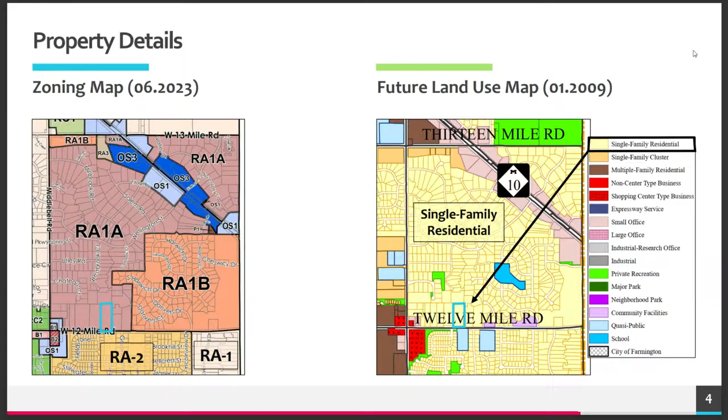Moving over to neighborhood outreach. The northern neighbor, Wood Creek, we engaged with Hank Morawski, president of Wood Creek, at an early juncture. Actually, at the April meeting, Mr. Morawski was kind enough to write a letter of support for the development, which I will share on the following slide. The western neighbor, AIM High School, we've had multiple conversations with the AIM headmaster, who's been supportive of this development from the onset.

In addition, AIM Academy is amenable to granting a secondary access along our shared western property line, which was contemplated in the 2007 recorded shared access agreement between the city of Farmington Hills, Echo Park, now AIM High School, and the Youssef family.

On the eastern property line, Mr. Levy and Mr. Cole, we've had conversations with both of them, shared plans with them, and they've given us positive feedback and reception toward the plans. Actually, Mr. Levy, who lives in the house to the east of us, requested that we actually provide a greater rear yard buffer between our townhouses and that shared eastern property line.

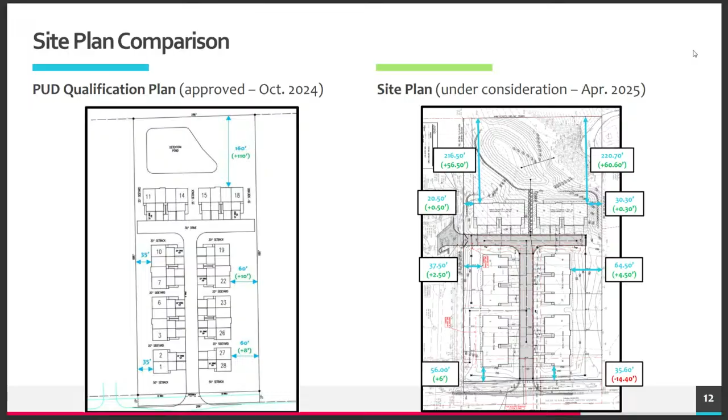Okay, so this is the site plan that contemplates that secondary access into AIM Academy. You can see it right here. And then you can also see where the Pebble Creek intersects our property, and I'll be talking about that a little bit more in the following slides.

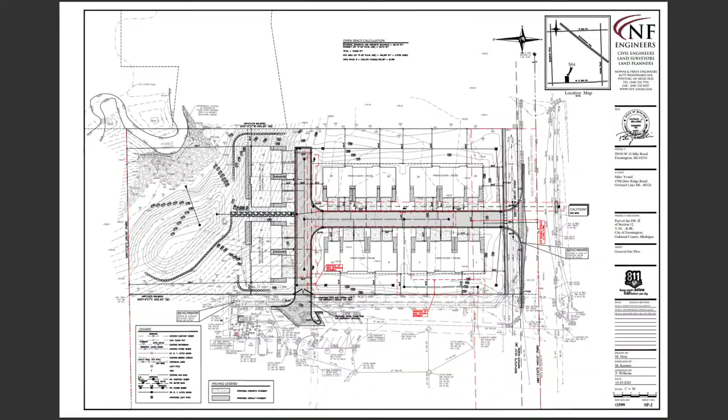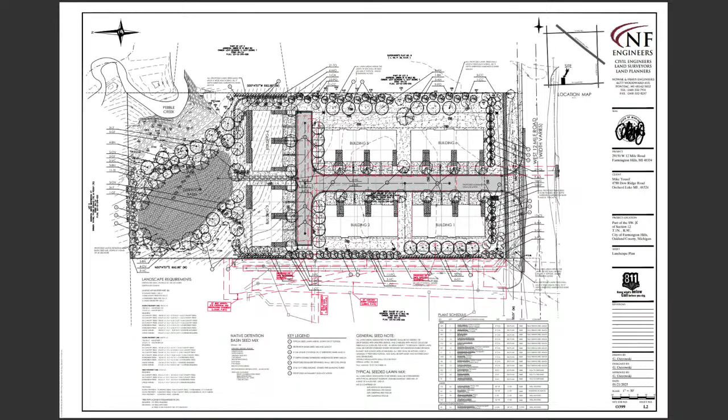Now, this is the landscape plan. Understand that the entrance is the same. However, not all the plans were updated to reflect that secondary access, but we are still contemplating that secondary access to AIM. Per the direction of Mr. Levy, what appears to be our northern property line, but is actually our eastern property line, we are putting a bunch of evergreens as well as additional landscape plantings to shield this to his residential household. We've got some nice plantings along our 12-mile frontage, nice screening around AIM Academy, but most importantly is all of the screening we are proposing around the stormwater basin and where the topography falls. So that'll be a really pretty amenity that residents can enjoy, specifically the residents that back up to that northern property line.

The 112 contemplates 3-bedrooms across the entire 28-unit development. Again, 50% of residents, based on national data M/I has collected, opt for the standard 2-bedroom, 50% opt for the 3-bedroom premium. At the end of the day, if everyone was to select a 3-bedroom unit, we would be roughly 8 units above the RC1 maximum. But with that 50-50 split, we'll be in line or slightly on the higher end of RC1. It is not my belief that we will exceed RC1, but I wanted to provide you with the absolute floor and the absolute ceiling so you could get an understanding, because it's the tenant preference, the resident preference, at the end of the day.

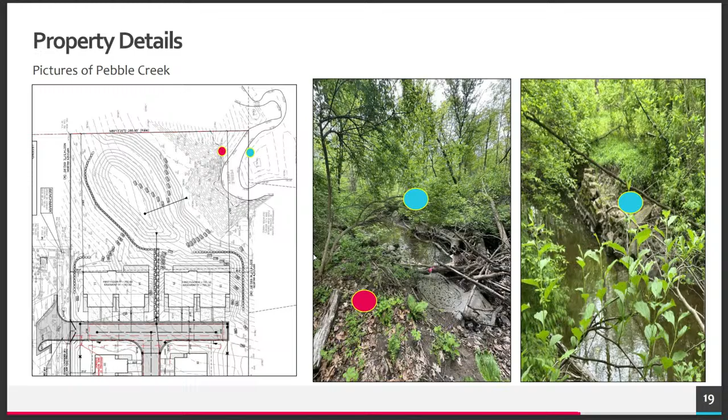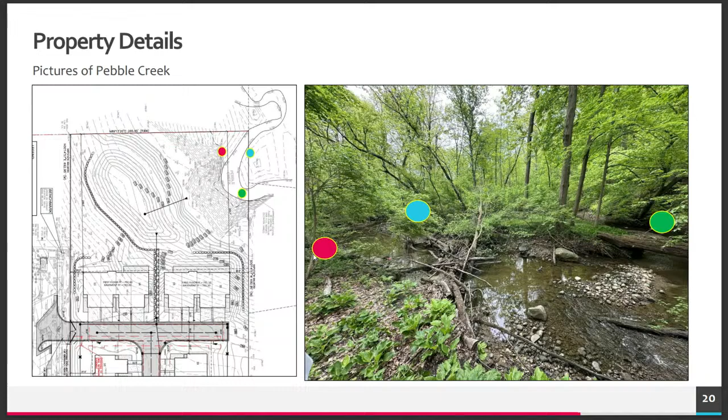This has been an issue that the City of Farmington Hills has tackled for many, many years. So as part of the redevelopment of this project, this is something we take as top priority to ensure that no further erosion continues along our portion of Pebble Creek that intersects our site.

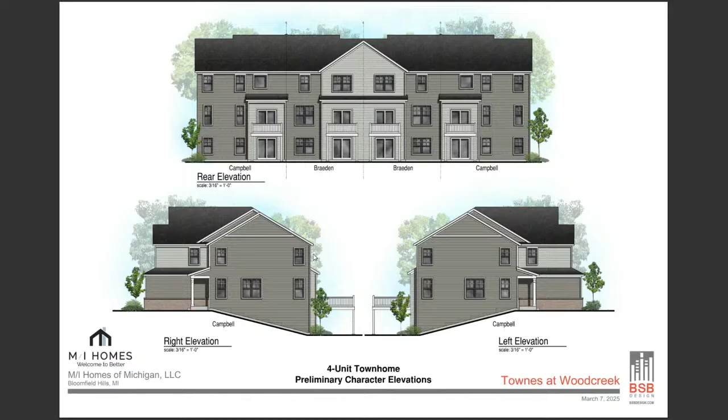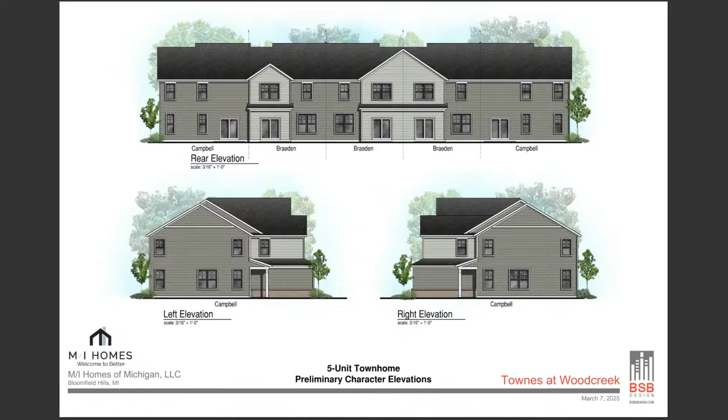Here is a representative elevation of the 5-plex units that will be on the eastern and western property lines. These will be slab on grade units, so the front elevation as well as the rear elevation will appear 2 stories. And again, these are all in compliance with the maximum allowable roof heights. We're at 27.7, ordinance is 30 feet.

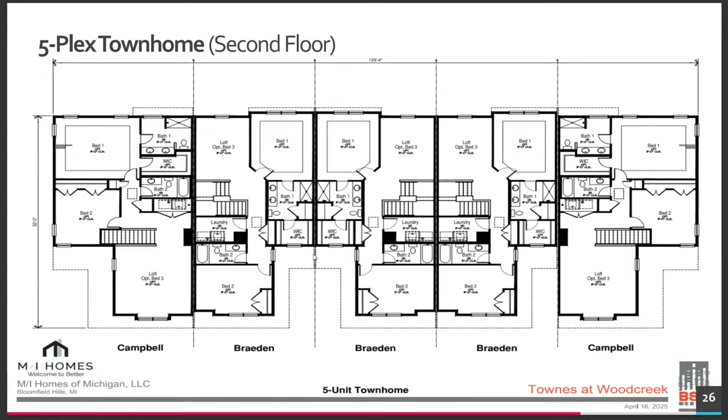Thank you very much. So who wants you to put erosion control on that creek? It was a request made by engineering in Mr. Cabrera's review letter. So the way erosion works, the higher the velocity of the water, the more soil it can hold. So the slower the water goes, the less erosion you're going to have.

So what they're asking you to do is clear out the river so the water goes faster, and then protect the bank. I would urge you to not jump too fast on that. If you just leave it alone, it might be fine. Just remember, the more debris you take out of that river, the more erosion you're going to get, because the water's going to move faster. I say that as someone who was with the Corps of Engineers for 20 years.

Okay? Oh, no, I absolutely respect that. And again, whatever guidance engineering gives us, we'll follow it to a T. I know, question them. I'll try to. As a developer, I don't have all the facts in front of me. But you've got it coming down, it turns 90 degrees, and then it turns another 90 degrees. In the long run, it's probably going to go straight. You know, streams meander. So I question it. Absolutely, we'll look into that.

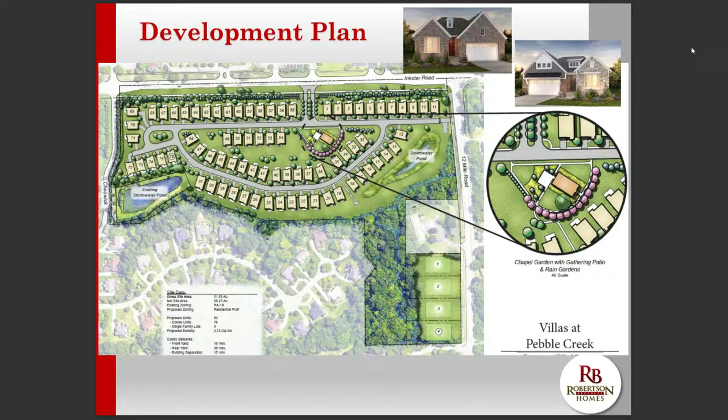So this is essentially the exact same thing that you have approved, with one exception, which I'll get to in a minute. But I wanted to point out that this was obviously vetted many times. We've had more units on previous plans, but hopefully everybody's happy with what we're proposing as far as the product and the overall project.

Tonight the request is very simple. The approved plan is what you see above along the frontage, along Inkster. The new plan would add unit, what was circled as 66, in place of where that street was. If you recall, the last time I was here was for the removal of that street.

This would have happened a lot earlier in the process if DTE could have given us information, but the information is that one pole has ITC equipment on there. It was going to cost a few hundred thousand dollars to move that pole, and we did not need that second access because we have an emergency access to the south on 12 Mile. So that was the last time you saw me, to remove that roadway, which did get approved by City Council on the 3rd of March.

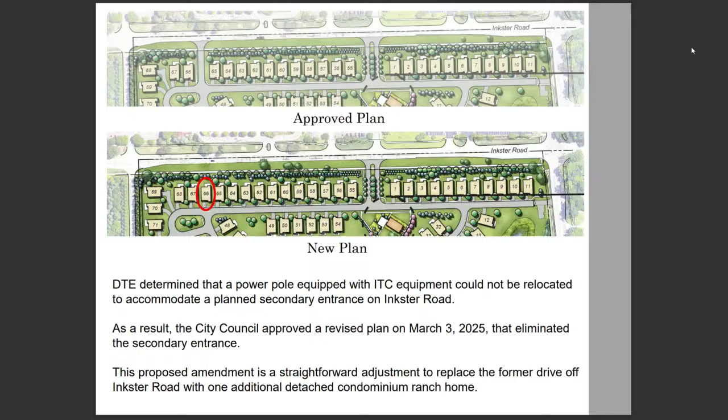Again, it's very straightforward, just to replace that open area, which had the road, with a unit. We think there's a lot of benefits to this. It provides another opportunity for residents to stay in your community or to come to your community, since it's an age-targeted product. They want to downsize, they want to stay in your community, and this is one more opportunity for them to do that. It supports your retention and reduces the likelihood of them going elsewhere.

So we've been through all this before. It opens up opportunities for families to then buy their homes in the school district, generate increased tax revenue, and one more household to contribute to the local economy. So again, we don't see this as a negative. We see this as a positive, a net positive to everybody.

I don't think I need to go through this again. You guys have seen this, but I just wanted to throw it all on there to familiarize yourself again. I think this is the important thing. It's a very important plan for Farmington Hills, really for any community. But we've been looking, as you know, a long time to build this type of product here.

You need basically 40 to 50 of these every single year, so having one more just helps get to that requirement. And this buyer profile, compared to single family, it's almost half—just a little bit more than half of what a single family has as far as traffic and utility. That comes straight from our traffic engineer: considerably less. So this one additional unit is not measurable whatsoever.

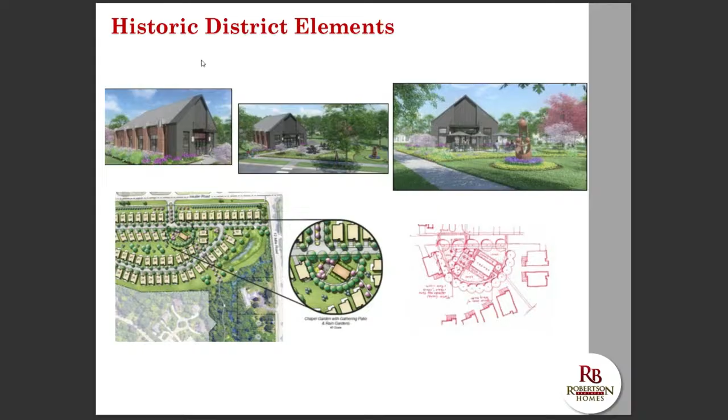If you recall, we do have the historic district elements. We'll be removing much of the building but keeping the chapel, which is the most important part I think, and creating that as a community space. That has not changed. Nothing has changed on this plan whatsoever except for that one additional unit we're proposing.

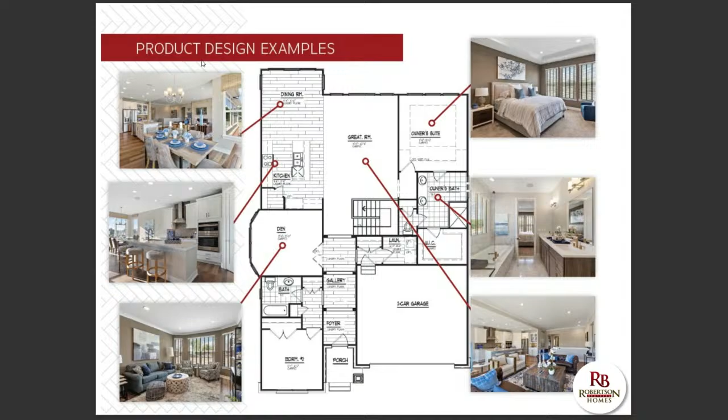I don't think I need to go through these because you guys know, but we've got about 40% of the site as open space. That doesn't change with this. And again, we had a road there before, so obviously that doesn't change it. There'll be a homeowners association to maintain all the landscaping. These are the homes which you've seen. Again, I don't want to go through this quickly, but you know the plan very well, and this is exactly what people are looking to buy in your community.

So I just think it's very simple. I think it's fair to say, had we come to you originally with 76 detached condominiums and 4 single family, I don't think there'd be any issues. In fact, this body has approved more units with townhomes on Inkster in the past. No measurable additional traffic, obviously, for the one unit.

No one will ever see that, and there's just no neighborhood opposition. You're not going to see anybody opposing this. In fact, had I asked, we'd have the neighbors supporting the additional unit. We've just worked very hard with them over the time we've worked on this. Again, no change to the plan—everything stays the same, open space, chapel stays, and it's a plan that the community wants.

So I'll say it again: one more opportunity for home buyers to stay in your community with a quality housing option. It's one more opportunity for a family to move into, a downsizing couple's home. It's one more home to produce property taxes and one more household to patronize your commercial establishments. So I appreciate your time. I think this will be the last time you see me on this, but I'm happy to answer any questions you have, so thank you.

Fingers crossed. Any questions? Barry? Some of us have been around for a little while.

Yes, like, I started out on planning in 1995, kind of migrated to council and I'm back. And this is about the fourth or fifth plan, or this is probably the third or fourth plan you presented, but this is maybe about the sixth, seventh, or eighth plan for that particular corner. And I'd like to see someone build something there, because you have a bunch of dilapidated buildings that haven't been used for years, and I know they're full of asbestos.

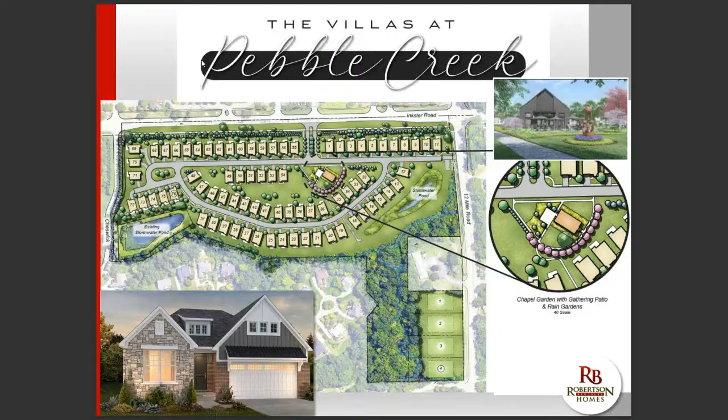I'll be able to talk to you about that on Monday when you present it to the Brownfield Redevelopment Authority. But the thing that I'm trying to point out, this is probably your fourth or fifth time up here just changing your plans around. I happen to like your plan. I don't care about adding the extra lot in there. I just want you to build something there, because that's been an eyesore for the city for over 30 years.

So I'll tell you what we're doing. We've already drafted the final engineering plans. We're ready to submit.

Regardless of tonight, we're ready to submit with or without that unit, so we are raring to go. I have been waiting for the city for a PUD draft. Once I get that, we can get to the city council. I think that's the one thing kind of holding that process up, along with the final engineering review, which we have not submitted yet, so we're still working on that. We would not have spent hundreds of thousands of dollars on final engineering if we weren't serious, so we are 100% serious.

We will not get this paved this year. There's no way, and we still have to wait for the lift station to be built on 12 Mile. But our intention is to close on the property this year and start removing the building and clearing and grading. That is 100% in our plan for the year.

I saw that in the Brownfield plan. Yes, so you're talking about 2026 taking things down and then hopefully opening up. Hopefully we'll start taking them down this year, 2025. That is 100% our plan.

Anyone else? Okay, Joe? I do not have a great deal to add. You saw this plan, almost this exact plan, back in, I think it was November, when you sent it on to council. They're adding one unit to bring the number of units from 75 to 76. I reran all the numbers on density and things. It amounts to a rounding error. I didn't actually even have to change anything because I had them all in the decimal, the tenth place, and none of them changed. So it really is a very minor change to the overall plan.

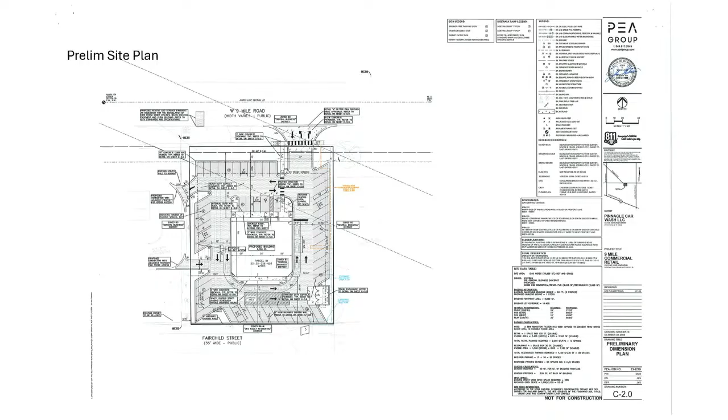Any questions, Joe? Okay, this is a public hearing. I'll open the public hearing now. If you'll step up here to the microphone and give your name and street. Okay, seeing no one moving toward the microphone, I'll close the public hearing, and it's back to the commission.

Joe? I just need to say something, I guess. Generally, I'm not a big proponent of drive-throughs. However, if you're going to have a drive-through in this community, this seems to be a fairly good location. It's been a vacant property for a long time. And I just wanted to say I appreciate one thing about this plan, and that is, while we require the outdoor seating, this outdoor seating is nowhere near the queuing line. When they put the outdoor seating where you can sit there and smell the fumes, the exhaust, yeah, I really don't appreciate it. So I just wanted to point out that one positive thing about this design. Okay, thank you. Anyone else?

I move that application for special approval 50-1-2025, dated January 31st, 2025, as revised, submitted by Pinnacle Car Wash LLC, be approved subject to all applicable provisions of the zoning chapter for the following reasons: the use would not be injurious to the district and environs, the effect of the use would not be contrary to the spirit and intent of the zoning chapter, the use would be compatible with existing uses in the area, the use will not interfere with orderly development of the area, and the use will not be detrimental to the safety or convenience of vehicular or pedestrian traffic.

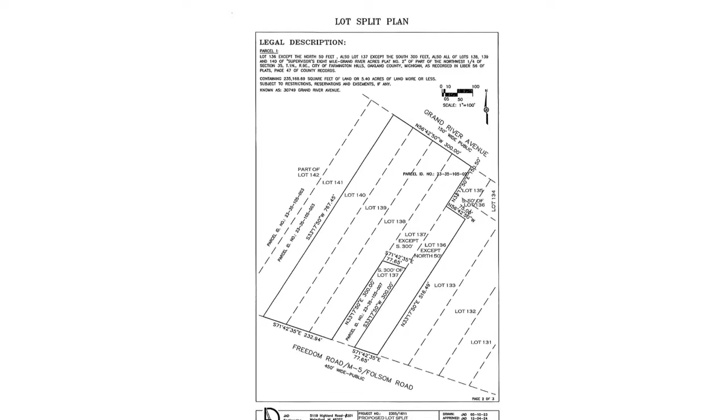Let's go back, here's the progression. That's existing, parcel 1, and then parcel 2 -- yep, that northeast corner. I'm supposed to understand this? Parcel 2.

Anybody? That was a good question. I just don't know what it is. I'd be glad to vote for it, most probably, but I don't know what it is.

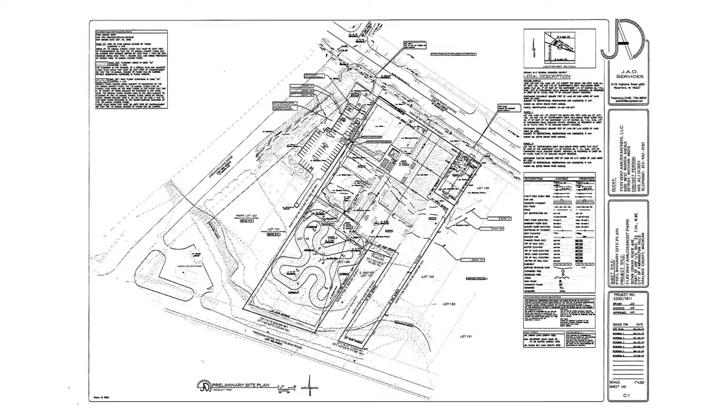So when you're looking at the sheets, lots 135 and 136 become parcel 2. Up in the top right, it says that's parcel 2. Just for clarification, parcel 2 does not get its own lot ID number?

Well, it wouldn't be referred to as a lot, but it would get its own tax identification number. It won't be reassigned a lot number or anything like that, just a tax ID number.

Exactly, because the lot numbers that you're seeing here are the remains of an old underlying plat. Part of lot 136 will be part of parcel 2. So it's all of 135 and a very small portion of 136.

So we could call it the northeastern corner of this property, to facilitate a separate business and development along the Grand River corridor that needs development, and someone has recently done some aggressive redevelopment or improvement that I'm looking forward to.

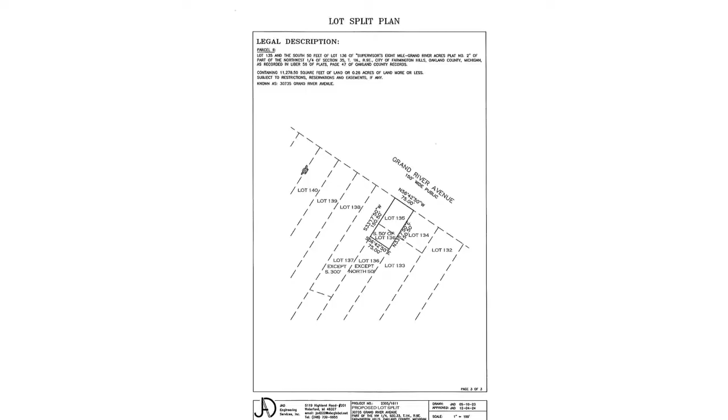Okay, you're good to go. Thank you, Tom. Any other questions? Okay. Somebody make a motion already? Did he speak? Do we need to hear from you? Do you want to talk? You don't need to, you know. Don't need to hear from me.

My name is Jim Allen. I'm here on behalf of the transferring entity. Okay, I'll do it. Thank you, Jim.

I move that application for lot split 1, 2025, final dated January 23rd, 2025, as revised, submitted by Funway Real Estate LLC, be approved because it appears to meet the applicable provisions of Chapter 34 zoning and Chapter 27 subdivision of land of the city code and will result in land parcels generally compatible with surrounding parcels in the vicinity, and that the city assessor will be so notified.

Second. Moved and supported. All those in favor of the motion signify by saying aye. Aye. Those opposed, same sign. The motion passes. Good luck. Thank you.

It took so long to get to this. The next item on the agenda is lot split 2 of 2025, final PUD 6, 1993. Location is 27614 Middle Belt Road. The proposal is to split one lot into 2 lots within OS1 office district. Lot split approval, and this is the final split.

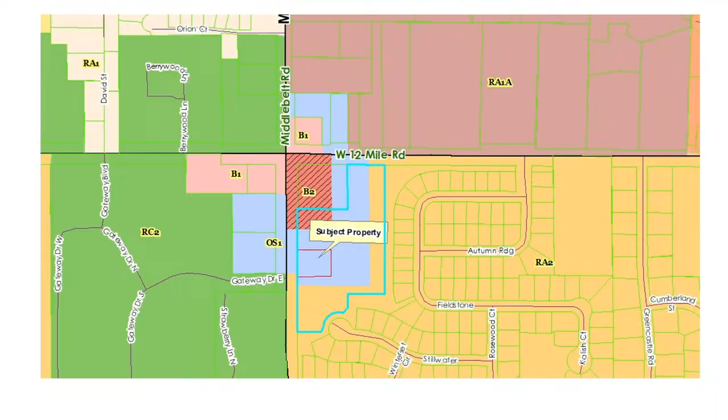Thank you, Mr. Chair. So this site is actually a portion of an existing PUD that includes a mix of both the commercial shopping center and the residential portion to the rear. The Planning Commission did see a site plan relevant to this site in 2023 and 2024, which included a drive-through in the outlot area. The applicant did decide not to proceed forward with the drive-through, but at this time they're looking to split the lot that includes that kind of outlot structure. The site right now is zoned a mix of OS1 and B2, and the southern fringe of the site has the underlying RA2 zoning.

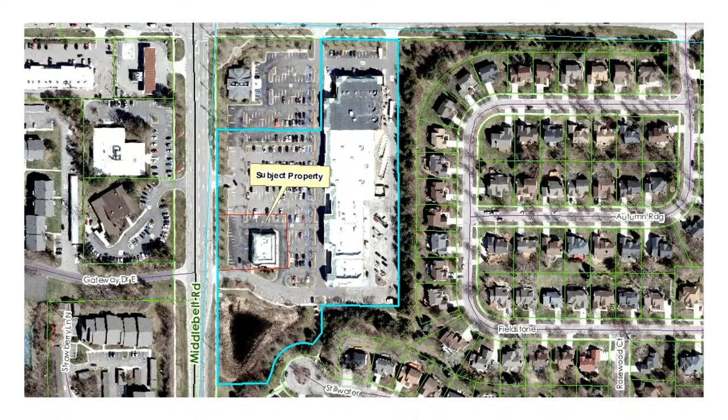The portion of the PUD that's considered here is 7.5 acres, but it would be split into 6.8 acres and 0.655 acres. I don't have a lot of comments on kind of the typical lot split questions regarding orientation and things like that because of kind of the format of this as an outlot. The only surrounding parcels is the shopping center parcel that's surrounding.

They meet the depth to width ratio. I think the main thing with this approval is that we want to confirm with the city attorney that it is only a minor PUD amendment to the actual PUD agreement itself, which I'm sure states the parcels involved. But aside from that, happy to answer any questions, and that's all I have for my review. Any questions? Steve?

Do we need to consider any cross easement, and has it been evaluated for parking? Would we need a shared parking agreement for this? Those would all be conditions that have to be met through engineering review, as part of the final review of the lot split by the engineering department, with all agreements in place prior to approval.

So it'll take place administratively after tonight. Do we need to make that part of our motion as a condition of approval? Before the split is recorded, that has to be completed. It's standard process, but we could certainly specify it in the motion. I don't think it would hurt.

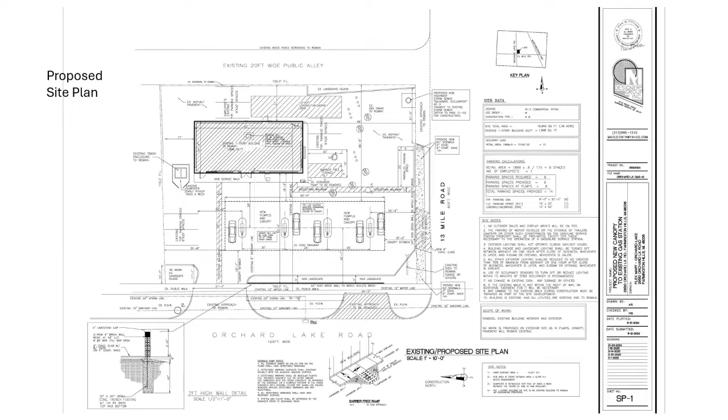Not your fault, but it was confusing that the statement says that all requirements are met. It probably in the future should be worded a little differently, for a conditional approval. The draft, reading from the draft motion? Yeah, so, yeah, I read. Meet applicable standards, is that what you're saying? When it says all are met and they aren't, it should say all except the following are met. Yeah, I agree, that's fine, yeah.

All, of course, am not talking to you, as you know, Dale. You can still talk, Joe. Yeah, okay, we're friends, you know.

Okay, people are listening. As much as we want it approved and stuff like that, we just want clarification on that circulation that we've been going back and forth for months with the planning department. And Giffels Webster maybe, but I don't communicate with them, I communicate only with. So my motion is.

Hang on, that circulation. So from the city's perspective, that is an ordinance, that does not meet ordinance. So he is going to need to get a variance from the ZBA for that circulation. We need a variance for that, that's fine, okay. For the circulation, that is.

Okay, and so, the front yard setback, canopy for the air canopy setbacks, as well as the parking area setback. They have to explain their approach to zoning and hopefully get the variance. We're trying to support you and help you, but you still have more work to do. No, I understand, thank you.